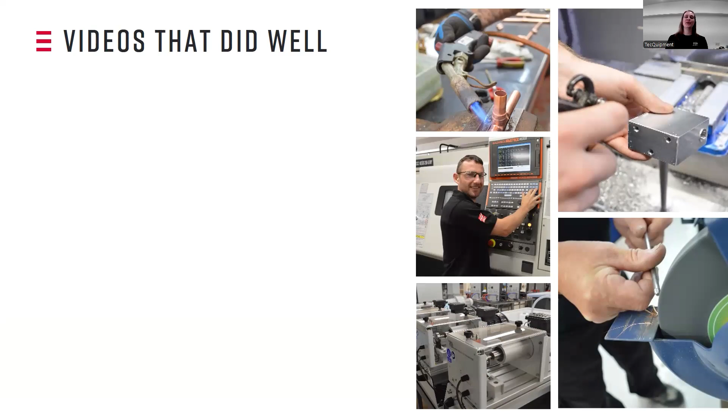Now, I just want to go through videos that did well, because we want to be able to continually give you improvement and feedback. So by providing what videos did well and what improvements videos could make, hopefully it means any other video submissions you give will be even better and make it an even smaller percentage between the winners and the runners up. So, videos that did well.

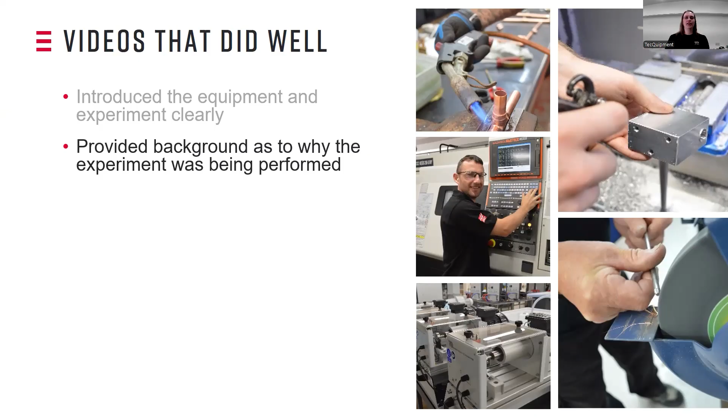They introduced the equipment and the experiment really clearly, so for us as judges, it made it really easy to understand what was happening in this video. They provided a background as to why the experiment was being performed. So again, us as judges, we're not left questioning or wondering, what is happening in this video? What am I looking at? So by having that clear outline, we can just sit back and really enjoy what is happening in that video.

So videos that critically analysed the results that were presented, they showed us what was happening and why, and if there were any errors, what they would do differently, or how they could mitigate this in the future, or if they can't mitigate the errors, why is it important to know this? They also showed and demonstrated using the equipment in an easy to follow step-by-step process.

This was really great to see, because us as judges, we all work at TecQuipment. We all know our products, so we understand what we're seeing, what you're doing, and the outcome of what you're going to do. But when we post these videos, people watching it aren't going to really know. So having a step-by-step process really shows customers your full use of the equipment and how your use of it and your outcomes can influence things in the real world.

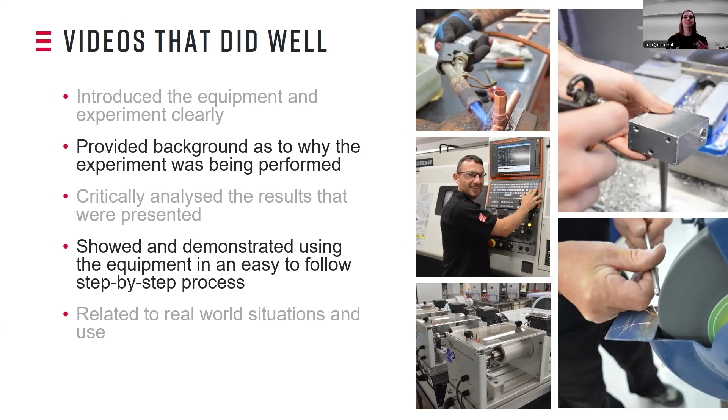And that relates to the last point, real world situations. So how using our product can influence your studies, but what it would mean in the real world. Because we're all about practical hands-on education. So being able to use our products to learn something, we want your videos to have that same process. And the top videos that did well did just that.

So as I said, we'd like to also give feedback for improvement to try and help all the other videos get even better scores to make even greater videos in the future. So a point to improve, have a clear outline of what the presentation will be about and its purpose. So having a step-by-step or a timeline or just a really clear introduction makes it really easy for us as judges, as I said before, just to sit back and enjoy your video. If we're left guessing or we're not really clear on what the video is about, this is where you will lose points.

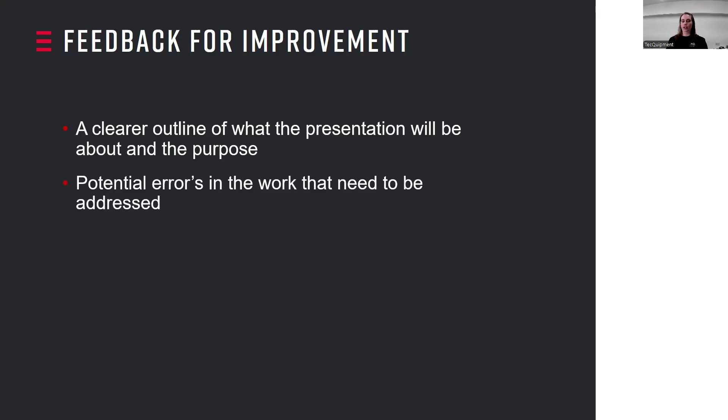Potential errors in the work that need to be addressed. We know in engineering sometimes errors can occur. The best thing to do is problem solve this and understand why. If you do that in the real world, why can't we see it in the video? We want to be able to help you assimilate into the situations that you will be in in the future. So telling us these errors will help with this.

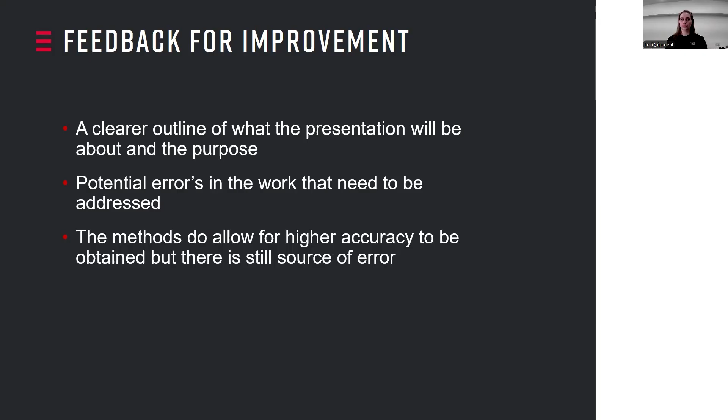So methods do allow for higher accuracy to be obtained, but there is still a source of error. So even if a product, apparatus or specimen in your experiment has led to a really high accuracy, there are still things going to happen which could be sources of error. So explaining these potentials will really boost your points up to the maximum.

So, what we're here for today: the two videos from York College of Pennsylvania and Southampton Solent University, who are battling it out for the crown and winners of TecQuipment Student Competition 2025, are the following two videos. Now we're going to watch both videos and then find out who the winner is.

From York College of Pennsylvania, studying civil engineering. Together, we're excited to present our research on the influence of weir nose geometry on broad-crested weir hydraulics.

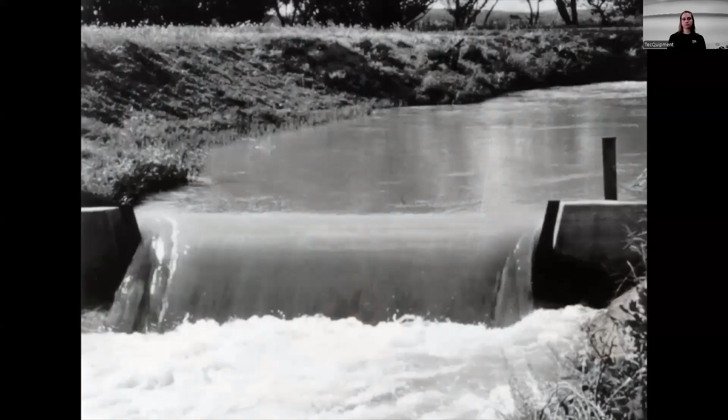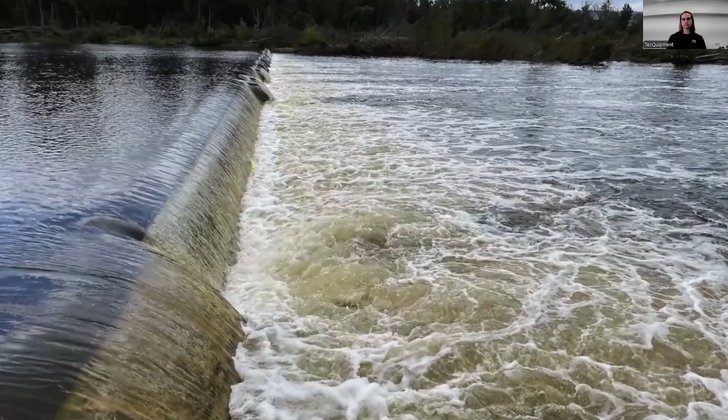Water is one of our most vital resources, and managing its flow is critical for both communities and ecosystems. Broad-crested weirs are essential hydraulic structures used in dams, spillways, and flood control systems. Broad-crested weirs control water flow to prevent floods, ensure steady water supply for various needs, and protect communities by managing downstream speed and volume. But not all weirs are the same.

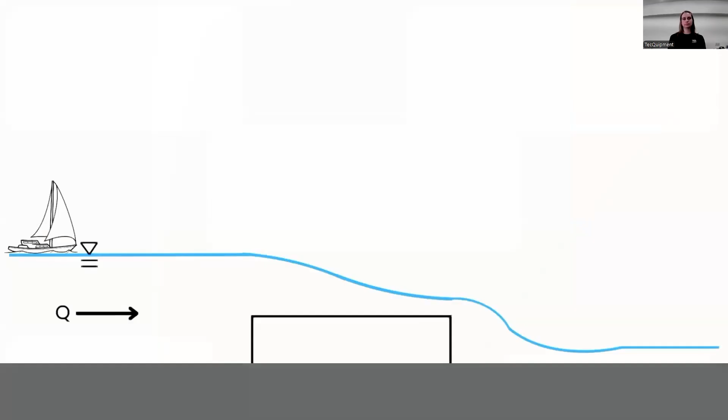Small design variations, such as shape of the nose or its radius, can significantly impact how water behaves as it flows over the crest. These differences affect the flow velocity, water levels upstream, and even the efficiency of water discharge. Our experiment focuses on these geometric differences, specifically how varying the nose radius of a broad-crested weir changes the flow characteristics in a controlled channel.

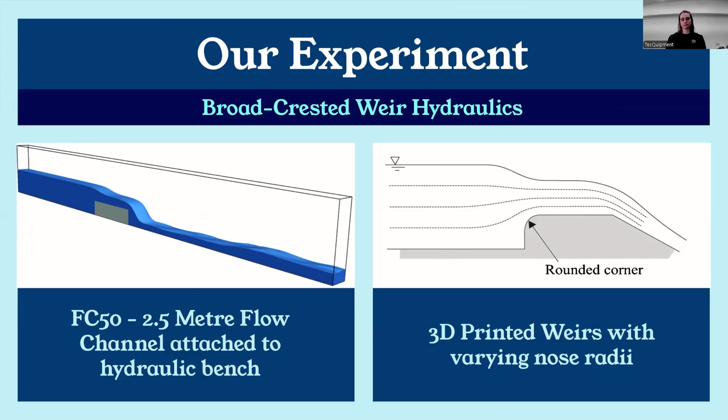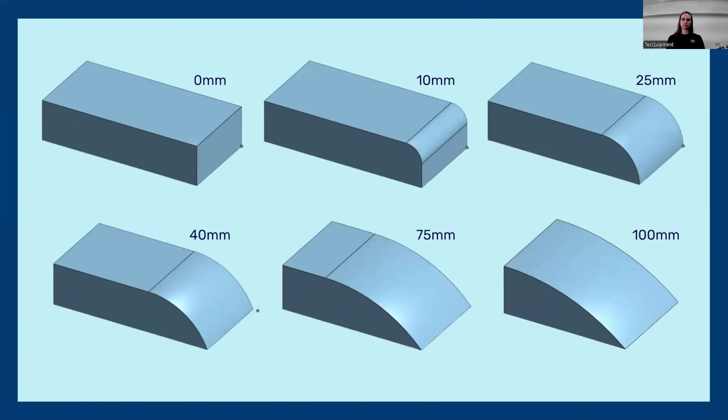To answer our research question, we designed an experiment to study how the nose radius of a broad-crested weir affects the upstream head, flow velocity, and discharge coefficient. We utilized the 2.5-meter flow channel, a hydraulic bench, and 3D printed weirs with different nose radii. In our experiment, we tested 6 different nose radii for the broad-crested weirs: 0, 10, 25, 40, 75, and 100 millimeters.

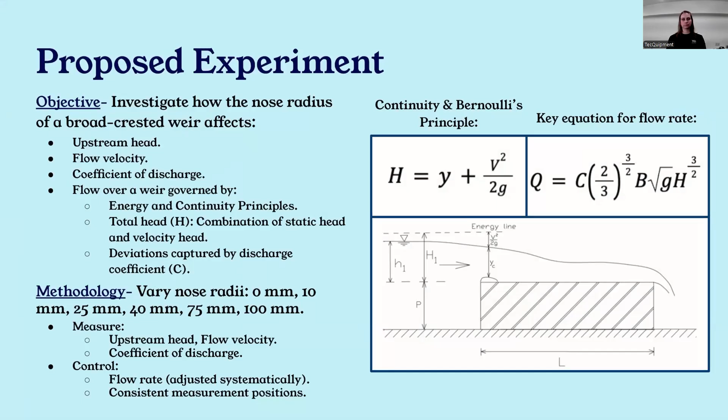When water flows over a broad-crested weir, fundamental energy and continuity principles govern its behavior. The surface level drops as water accelerates onto the weir crest due to the narrowing flow area. The total head H combines static and velocity heads above the crest, as described by the continuity principle and Bernoulli's equation. Real-world factors like friction, turbulence, and non-uniform flow cause energy losses, which are captured by the discharge coefficient C, which adjusts the theoretical discharge equation to calculate the flow rate Q.

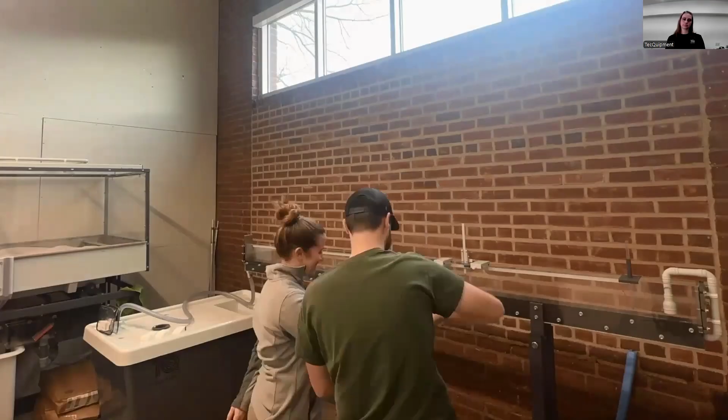We then vary the weir's nose radius and flow rates to achieve different upstream heads, aiming to see how geometric changes impact water flow efficiency. To start our experiment, we connected the hydraulic bench's outflow pipe to the flow channel's inlet pipe, turned on the pump, and adjusted the flow rate to achieve specific targets, recording them with the bench's flow meter.

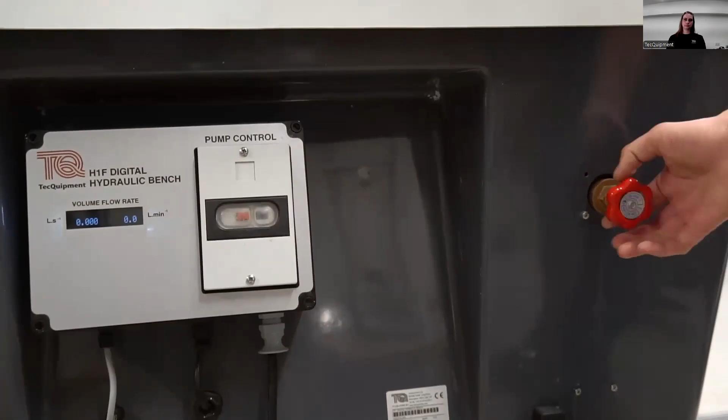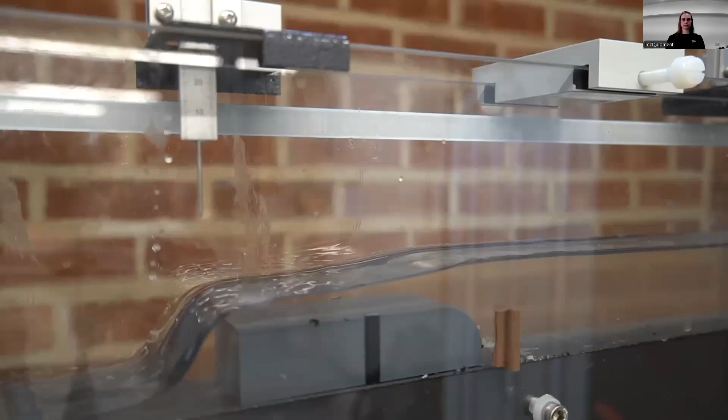We tested multiple weir shapes, some with no radius, others with nose radii of 10, 25, 40, 75, and 100 millimeters. For each weir, we focused on measuring water depths at specific points under controlled flow conditions. First, we placed the weir into the flume, centering it carefully. This position remained the same for all weirs for consistency. We measured the upstream water depth by using a depth gauge at a fixed spot on the water surface, then calculating the difference between this measurement and the upstream reference height.

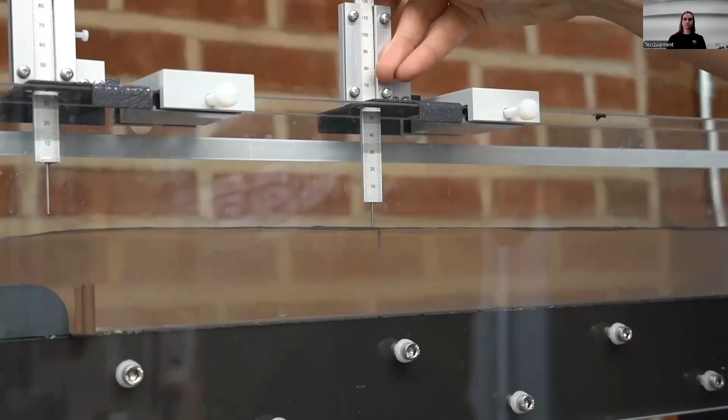Next, we used the depth gauge to record reference heights. These measurements, taken at the start, middle, and end of the weir, serve as our baseline for comparing water depths during the experiment. We then measured the water depth at the surface at the start, middle, and end of the weir crest, relative to its corresponding reference height. To ensure reliability, we took 3 measurements at each position and repeated this process for 4 different flow rates.

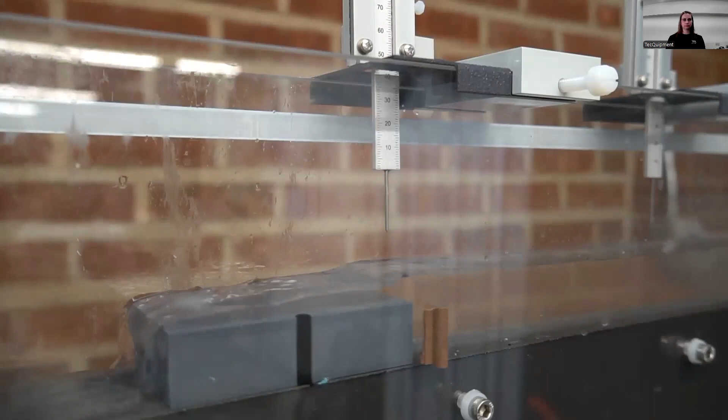After testing one weir, we replaced it with the next weir shape. We repeated all steps, recording reference heights, adjusting flow rates, and measuring water depths. By keeping our methodology consistent, we ensured reliable comparisons between different weir shapes.

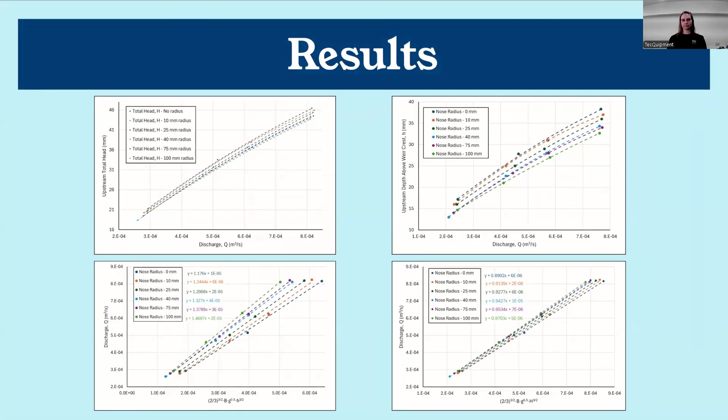The top graph showing upstream total head and depth above the weir crest versus discharge illustrates that the smaller nose radii result in higher head and depth. This translates into the bottom graph, where the discharge coefficient, represented by the slope of the trend lines, increases with larger nose radii, improving hydraulic performance over the weir.

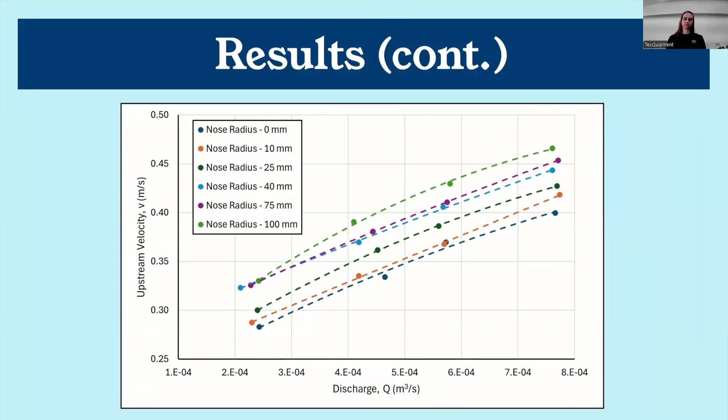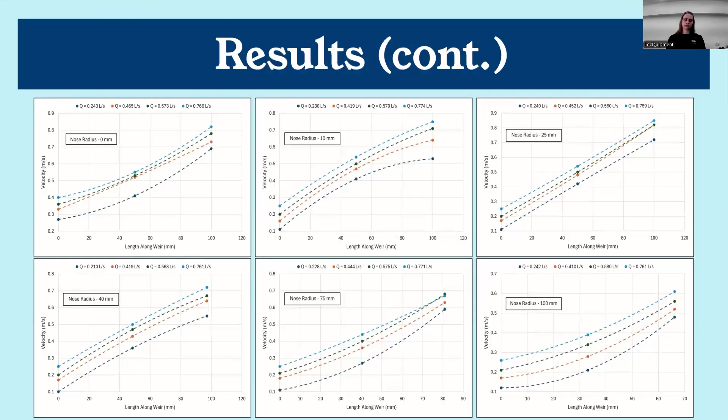This next graph illustrates the relationship between discharge and upstream velocity for different nose radii. Similarly, as expected, the graph shows us that larger nose radii consistently lead to higher upstream velocities for the same discharge. These graphs show how different nose radii on broad-crested weirs impact velocity distribution at different flow rates. Consistent trends appear across all configurations, with minor differences due to the changing nose radius. Overall, our findings confirm that the larger nose radii improve flow by reducing resistance.

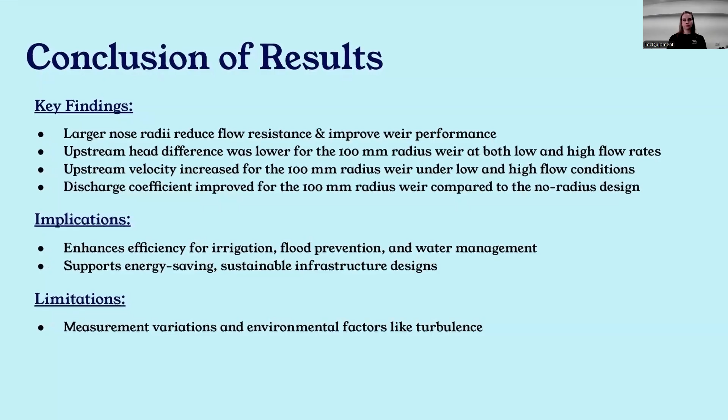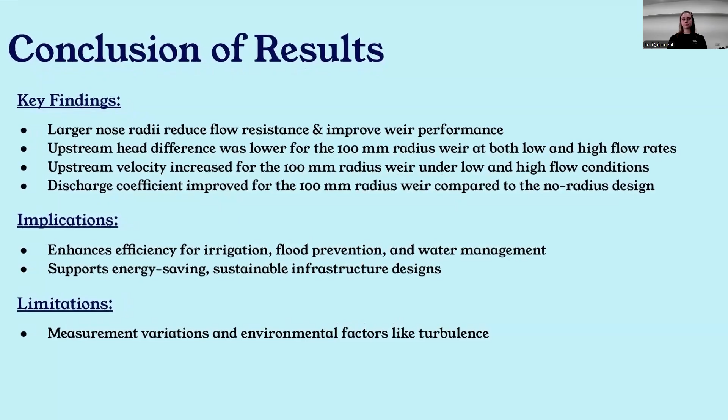At low and high flow rates, the no radius weir had a 4.9% and 6.08% higher upstream head difference than the 100 mm radius weir. Upstream velocity for the 100 mm radius weir was 16.4% and 16.1% greater at low and high flows respectively. The discharge coefficient using total head was 8.61% higher for the 100 mm radius weir, aligning with expectations.

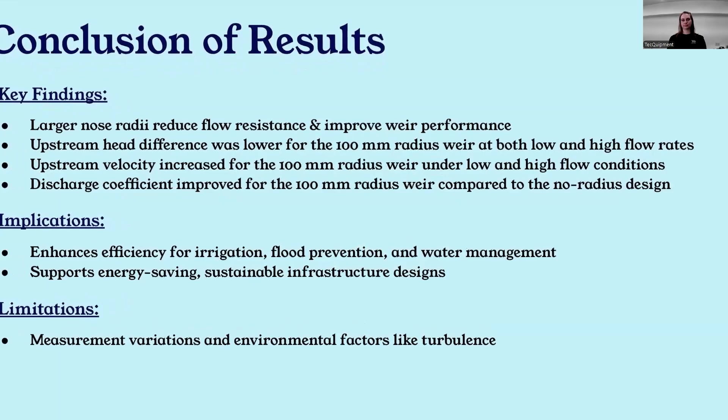Larger nose radii improve weir efficiency, reducing resistance and enhancing water management. Slight measurement variations and environmental factors could affect results. In conclusion, larger nose radii enhance hydraulic performance by reducing resistance and increasing upstream velocity.

We are excited to present our project, which was developed as part of our engineering materials module under the supervision of Dr. Tahan. We'll be answering the question, can we identify unknown materials using mechanical properties in experimental testing? This is important because in industry, safety and verifying your suppliers are common concerns, and recycling is an ever-growing need.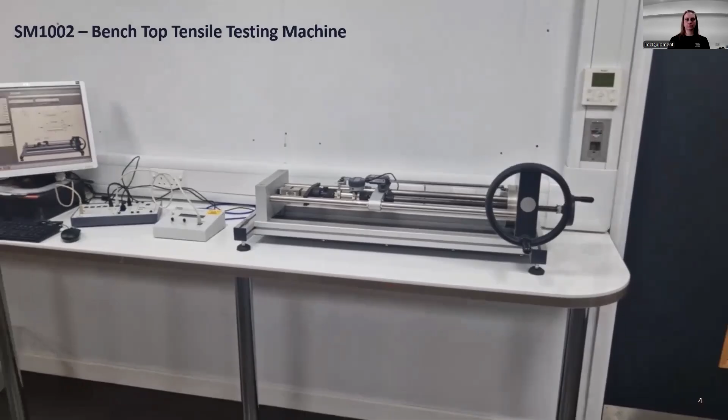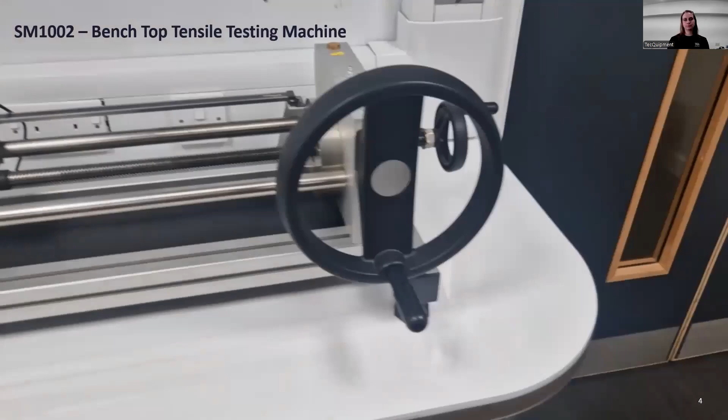The TecQuipment that we're using today is the SM1002 benchtop tensile testing machine. On the right side, we have the small coarse adjustment wheel for setup and a large wheel with a 50:1 gear ratio, which is used during tensile testing. Between the chucks, we've placed a long specimen for use with the optional extensometer, so we can calculate the Young's modulus.

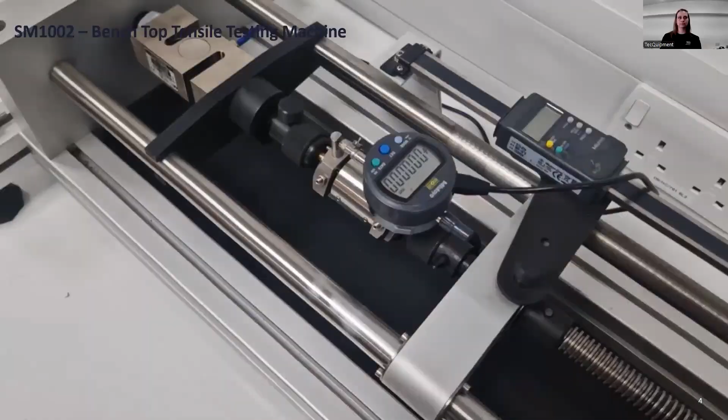To find the ultimate tensile strength of our materials, we need to use the short samples without the extensometer fitted. Data is measured by the load sensor and displayed on the digital load meter. The extensometer dial gauge is connected to VDAS software, where we input the sample dimensions and record the data from both the extensometer and load cell. This allows us to calculate the stress and strain.

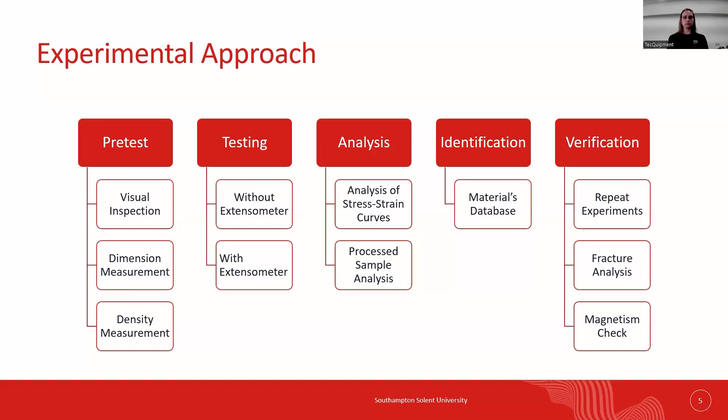This is how we'll approach the research question. We'll start with pre-test measurements before moving on to the testing. Then we'll analyze the results and use the results to try and identify the materials. Finally, we'll use several methods to verify our findings. To help narrow down the possible materials in the database, we calculated the density of each sample based on volumes and the masses. By using the density formula, we were able to identify a key physical property that supports material identification.

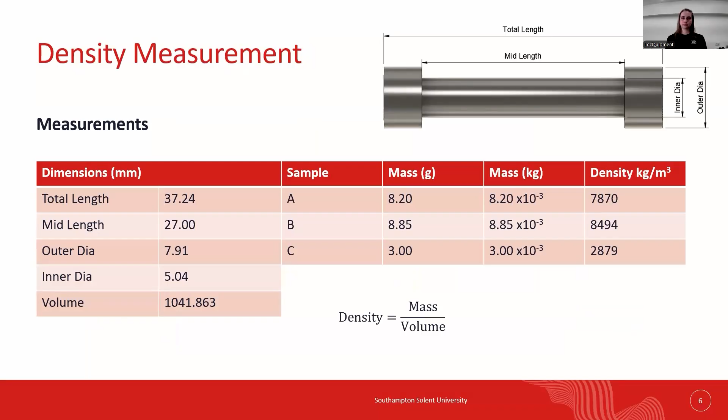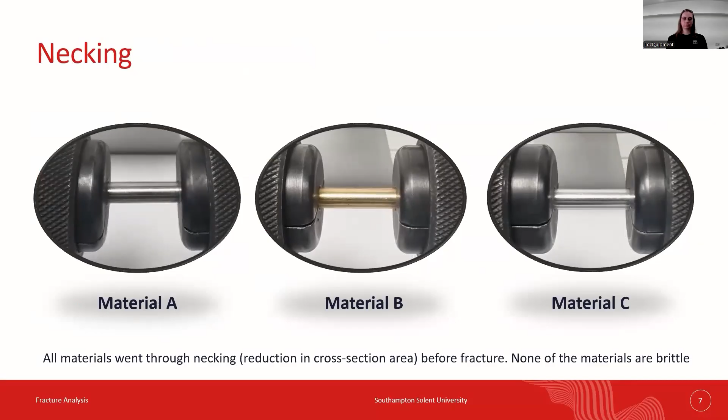Across our three samples, the behavior called necking is exhibited. This is where the material plastically deforms beyond the maximum tensile strength before fracture, causing a reduction in cross-sectional area. In the stress-strain graph, this is where the curve begins to fall off from the peak. Initially, we struggled to measure the elongation and reduction in cross-sectional area of fractured samples with a caliper, as we need to reassemble them. To rectify this, we used two alternative methods.

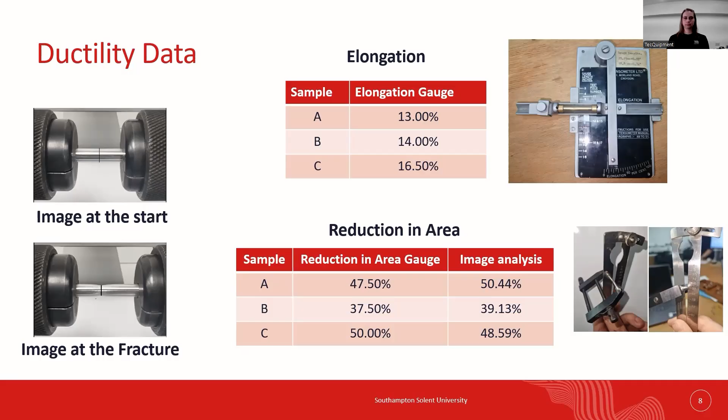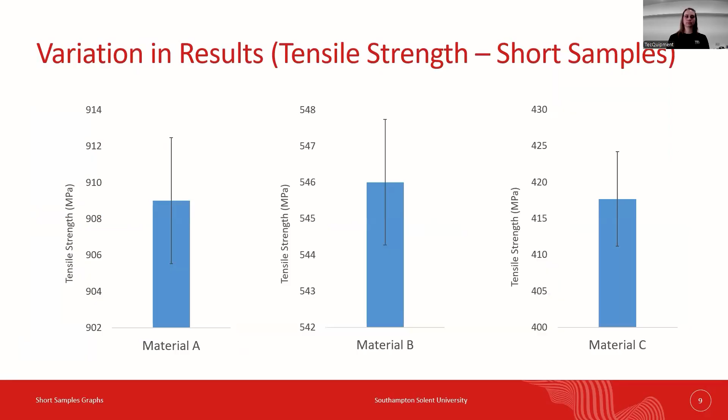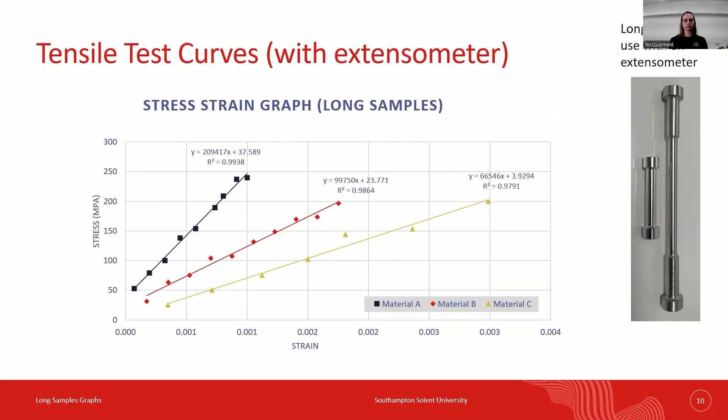We measured the tensile strength of short samples, and in our tests we observed variation in results. Some contributing factors such as machine accuracy, material defects, and slight misalignment during clamping added to the variation. An extensometer, along with the longer samples which are pictured on the right, were put into the tensile testing machine, which was then brought to a set force to ensure we stay within the elastic region, the data for which was used to calculate the Young's modulus.

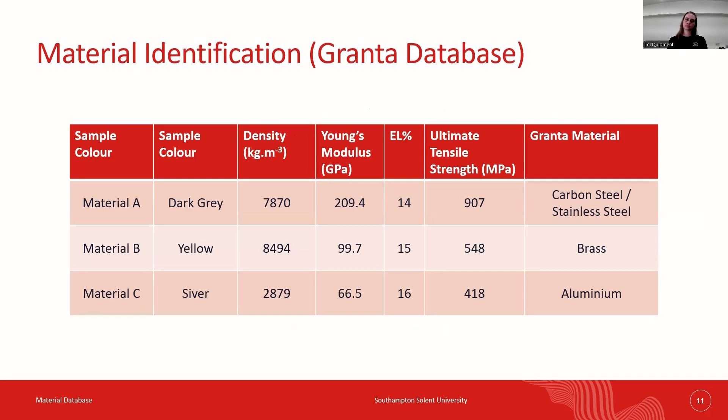We compiled our data comprising of the material density, Young's modulus, elongation percentage, and ultimate tensile strength in this table. We used the ANSYS Granta Level 3 material database of metals to identify our sample materials by applying the limits. In the case of material A, we found it must be a variant of carbon steel or stainless steel. Material B and C, we reached a much more conclusive selection of brass and aluminium.

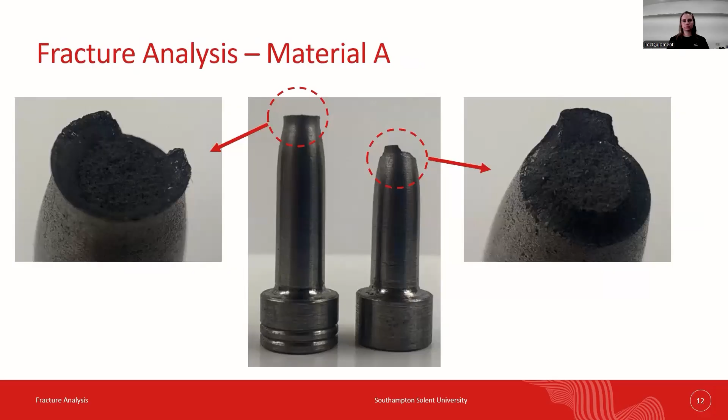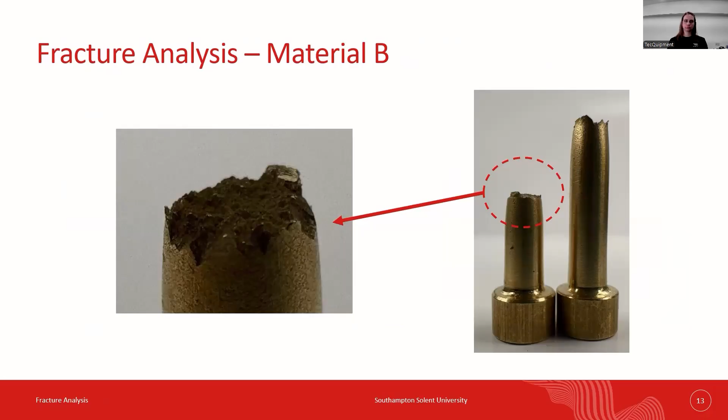In material A, we observed a classic cup and cone fracture, which is a clear indicator of ductile failure. A faint cup and cone shape is present, but it's much less pronounced than in material A. The tooth-like features around the edge suggest a mix of ductile and brittle behavior. This aligns with the properties of brass, which has moderate ductility, but can fracture more abruptly under certain conditions.

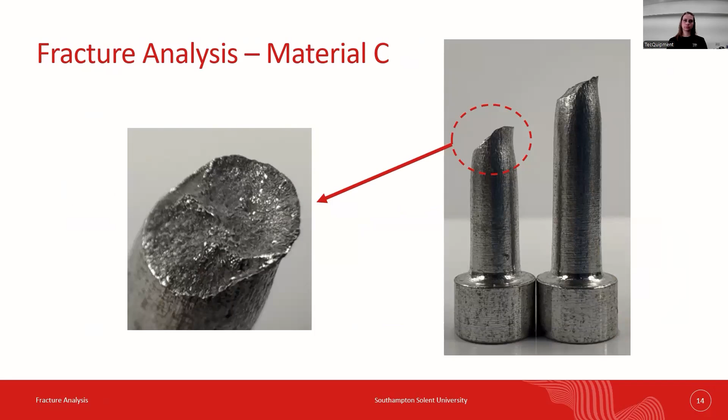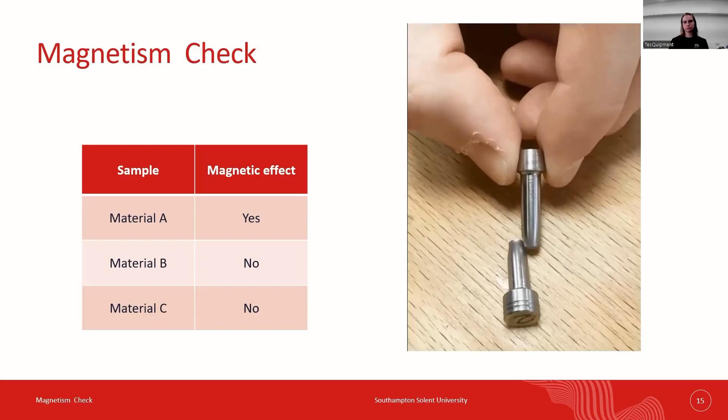The break shows a distinct angled shear plane and relatively clean surface, with little necking. This suggests a relatively brittle failure under shear. Even though aluminium is generally considered ductile, the behavior can be influenced by work hardening or surface flaws in the sample. As an extra step, we tested the magnetic properties of each sample to help narrow down the material types. This was especially useful in distinguishing between carbon steel, which is magnetic, and austenitic stainless steel, which is generally non-magnetic.

We can conclude that the method used was successful in identifying materials. However, other testing methods are required for higher accuracy on the specifics of material processing and grades.

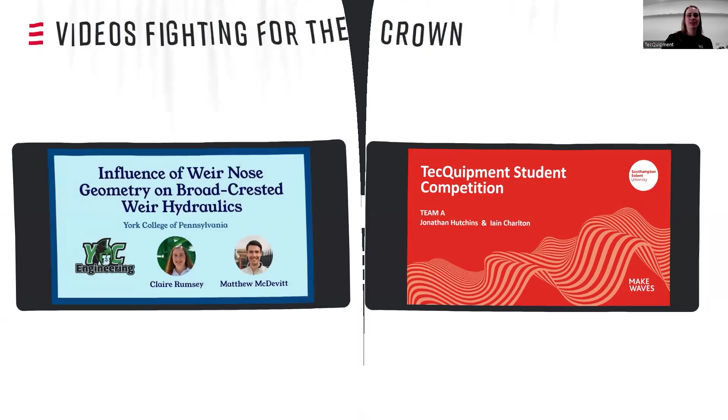So, those were our two videos fighting for the crown and the title of TecQuipment's 2025 Student Competition, as I said, from York College, Pennsylvania and Southampton Solent University. And I'm sure we're all excited to find out who our winners are. Now, as I said earlier, we had some really high caliber videos from all our entrants, so I just want to give a round of applause to those who also submitted. Now, between those two top videos, there was only 1% difference between them, which is amazing, and we are so grateful to have you submit these videos.

Now, the moment we're all here for and the moment you have been waiting for, the winners of TecQuipment's 2025 Student Competition, who will walk away with £1,150, certificates and a custom-made trophy are... It is Southampton Solent University Team A for identifying unknown materials using mechanical properties and experimental testing. Jonathan and Iain, your video was great, and as I said, that 1% difference really worked in your favour, as you are now TecQuipment's 2025 winners.

Congratulations to all. And I also just want to say congratulations to everyone who did enter our competition. Your videos and your work are amazing, and it really helps to show how you can take practical engineering education, use it, and how it can be used in the real world.